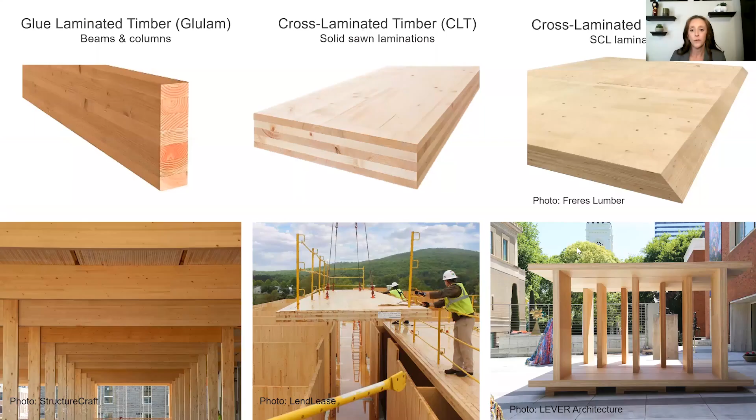So today I'm here to discuss with you the mass timber revolution. So mass timber is a very old concept that has become new again with the advent of technology and modern design practices and code changes. For those of you who are unfamiliar with what mass timber is, I'll just go over it very quickly. So glue laminated timber, many of you are probably familiar with. You may have this in your own home, or it has been in the roof of residences or commercial facilities that you've been in. So it is essentially dimensional lumber laminated together in the form of beams and columns.

Cross-laminated timber is the buzzword lately, and it is also 2x dimensional lumber laid out in sheets and laminated together with glue, and each layer is perpendicular to the next layer, and this allows for strength and structural stability. Another form of cross-laminated timber can come by utilizing wood veneers. So mass plywood panels is an example of this, where you take essentially what looks like very large plywood and secondary laminating them together, also adding to the strength and structural stability. So when we talk mass timber, think very large pieces of wood.

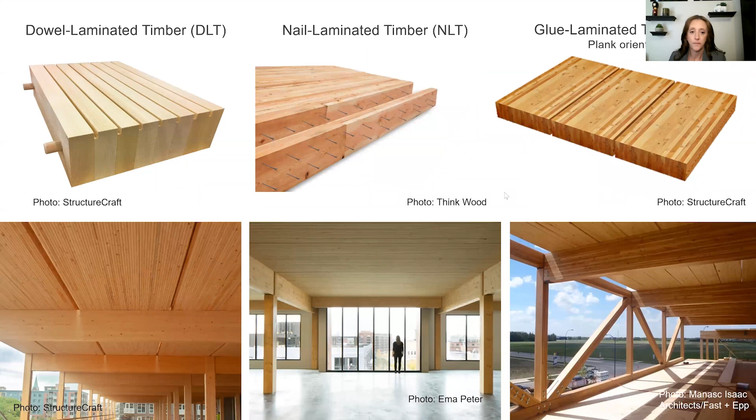Dowel laminated timber is dimensional lumber laid on its side and held together with hardwood dowels. This is often done in the factory and comes out as a finished product. Nail laminated timber is probably the very original mass timber and the very original dowel laminated timber. It is essentially dimensional lumber laid on its side and held together with mechanical fasteners such as nails. This can be done in the factory or on site. Glue laminated timber is a larger version of the glulam beam and column laid on its side and can be utilized for floor and roof decks.

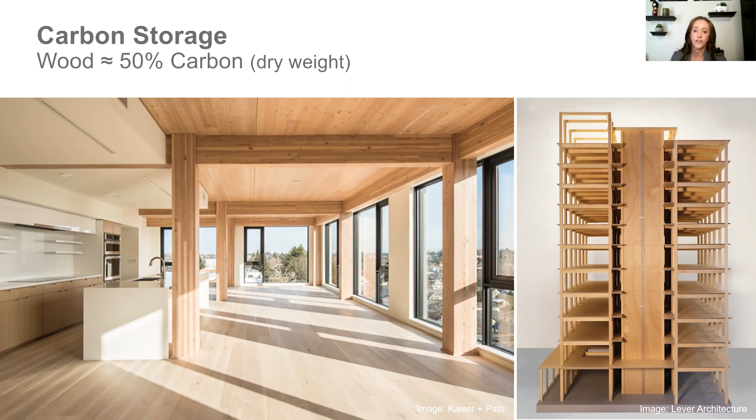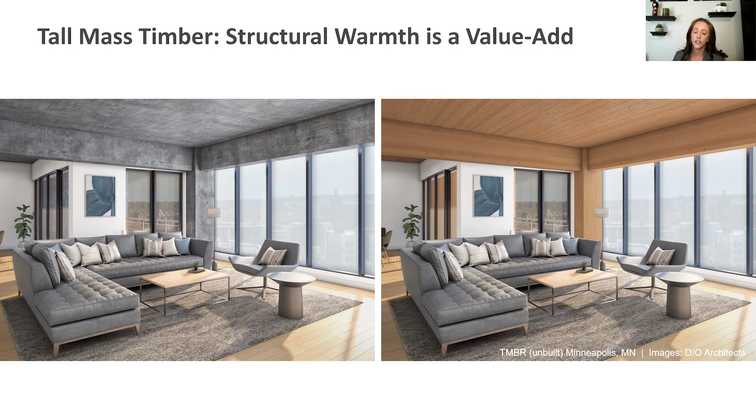As you can see here, exposing the timber as both the structure and the finish is a feature that many developers, occupants, and design teams are attracted to. It provides a warmth of structure that does not otherwise exist with other building materials.

Labor availability and labor shortages have plagued the construction industry for years. Mass timber projects regularly see significant reduction in the size of the crews needed to install these projects. That can help with some of the challenges projects face and make a project in timber definitely more feasible.

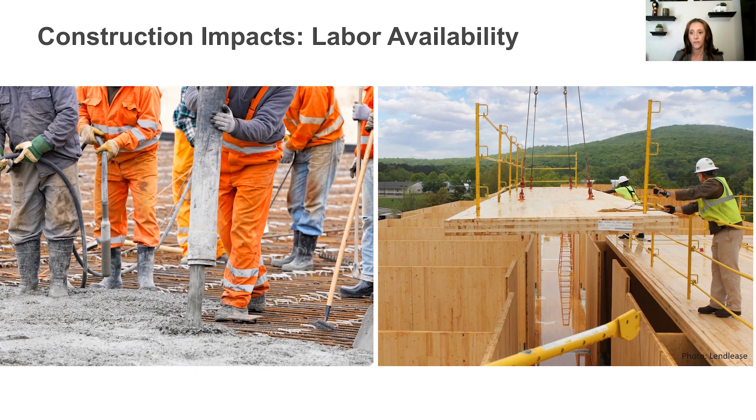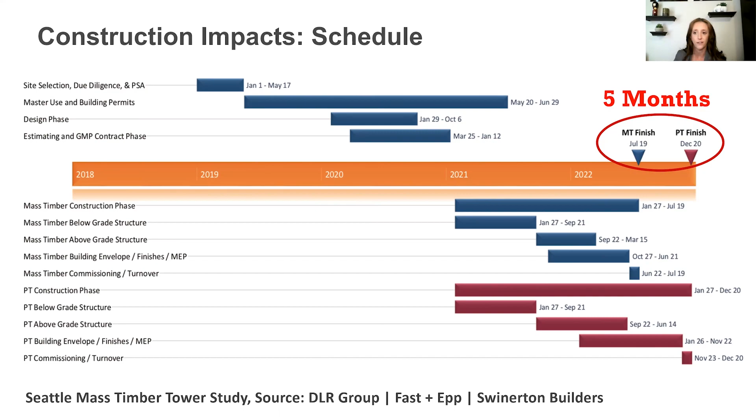So facilitating growth, how can we ramp up the adoption and acceptance of mass timber? So it starts with education and changes to the building code. So the International Code Council issues a new building code every 3 years. So the current building code is the 2018 building code. Many jurisdictions and states have not yet adopted that version.

For example, Idaho is largely using the 2015 International Building Code, but that is okay because mass timber was officially recognized in the 2015 International Building Code as a structural building material. However, come 2021, there are some exciting changes with regard to wood and mass timber specifically. So in the 2021 International Building Code, they're going to be incorporating some tall wood provisions.

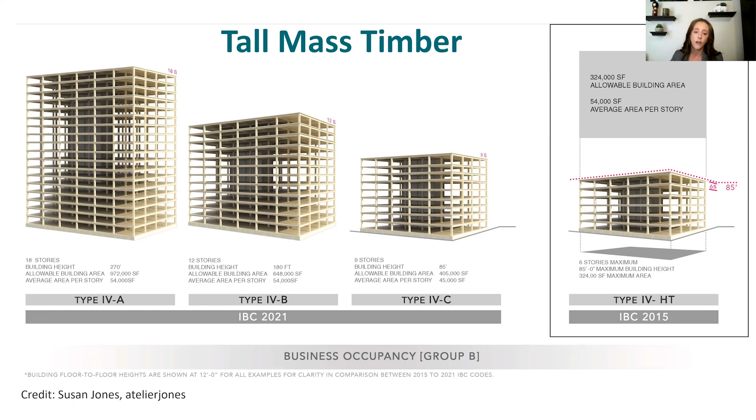And what this does: wood is currently only allowed to be utilized in a structure up to 6 stories in height. So in 2021, wood, specifically mass timber, will be allowed to go into buildings all the way up to 18 stories. So it is broken down into 4 different types. And with each step of the way, there are code provisions that will have to be adhered to. And a lot of that would have to do with how much of the wood can be left exposed.

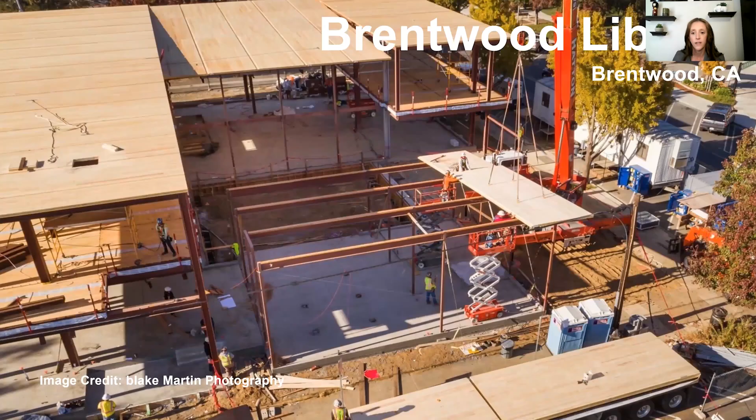Here's another library. This is located in Brentwood, California, and it is a 2-story library where they used CLT in the floor and the roof. And there's actually a second building on the campus, a 1-story auxiliary building where CLT was used in the roof as well. And one thing I'd like to point out is that this was the second project utilizing mass timber for this design team. And they only used CLT in the roof of their first project.

And what we're hearing a lot is that design and construction teams tend to dip their toe in the water with regard to utilizing mass timber. But once they've done it, they're eager to incorporate it again, and more of it, in subsequent projects. They find the material both fun and versatile and easy to work with.

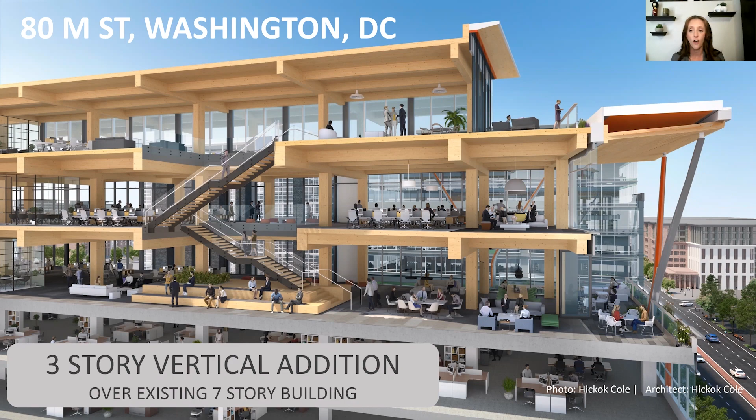This is also a very unique project. So one of the benefits of mass timber is it's relatively light in weight as compared to other building materials. So sometimes when you must expand, you must go up. So here is a building in Washington, D.C., of which they have added 3 stories of mass timber construction on top of an existing 7-story concrete building. So this is currently under construction.

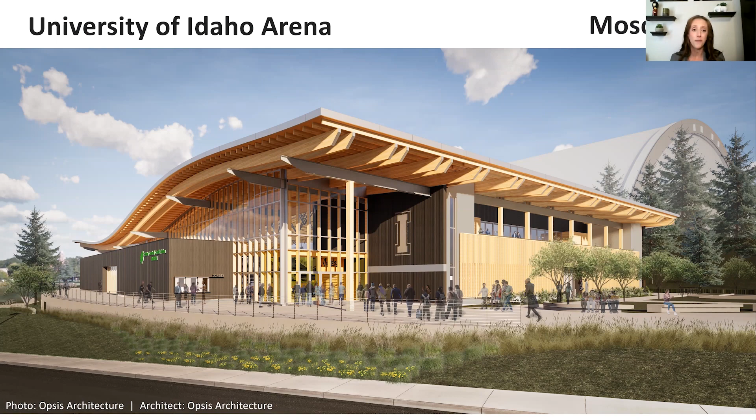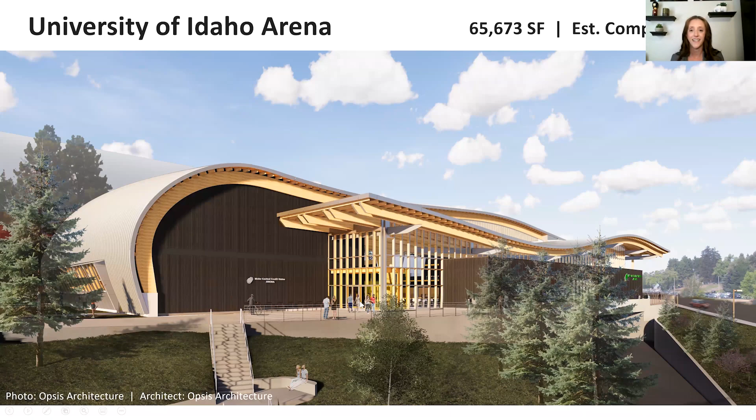This project, you might all be familiar with, is the University of Idaho Arena right here in Moscow, Idaho. And I won't go into too much detail on this project. Dennis Becker is joining us and he'll go in great detail. So this project is a 66,000 square foot arena that will finish construction in the summer of this year, and it is currently well under construction. So with that, I want to thank you for your time, and I'll turn it over to Dennis to talk more about the University of Idaho Arena.

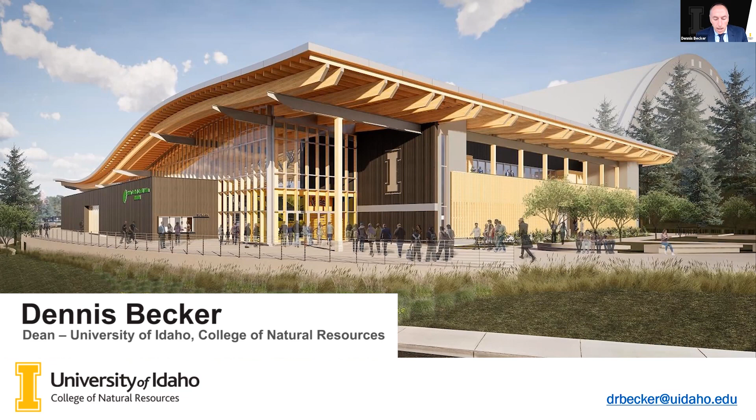My name is Dennis Becker. I'm Dean of the College of Natural Resources at the University of Idaho. As the land-grant institution of the state, our mission is to educate, conduct research, and provide outreach to the citizens of Idaho. We take that responsibility very seriously, and a bold demonstration of that mission is the Idaho Central Credit Union Arena being constructed on the Moscow campus. The ICCU Arena represents an application of mass timber in a uniquely Idaho way that builds partnerships and increases the ROI for Idaho through student training and public education.

People said we couldn't build this type of facility. They said it would be too expensive and that we lacked the expertise and workforce in Idaho to accomplish this. Well, in the spring of 2019, ICCU President Kent Oram and U.S. Forest Service Chief Vicki Christiansen joined me in breaking ground for a truly inspirational project that invested in Idaho companies, Idaho workers using sustainable Idaho wood. The U.S. Forest Service provided seed funding for initial design and building code review, and the Idaho Central Credit Union bought the naming rights. Today, we're just a few short months away from completing construction on the ICCU arena.

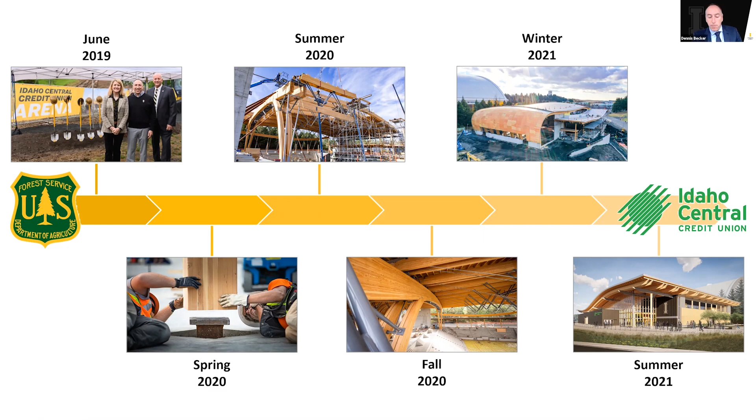Utilities and groundwork took about a year to complete, and this past spring, we set the first wood beam. From there, roof structure, walls, basketball courts, locker rooms were quickly constructed. And as we sit here today, the outside wrapping of dark cedar siding is being installed. Most of the building structure was completed in just one season, speaking to one of the benefits of mass timber. We are on schedule to complete construction this summer at a cost-competitive rate with traditional construction.

The ICCU arena was made possible through generous contributions of donors, student activity fees, and our strong relationship with the forest products industry in Idaho, which I would like to highlight. Douglas fir and larch were sustainably harvested from the University of Idaho experimental forests and surrounding public and private lands. The College of Natural Resources students planned and laid out timber sales on our forest. We worked with our student logging crew, and Mark Swanson Logging in Orofino, who transported the logs to Idaho Forest Group in Lewiston and Bennett Lumber in Princeton.

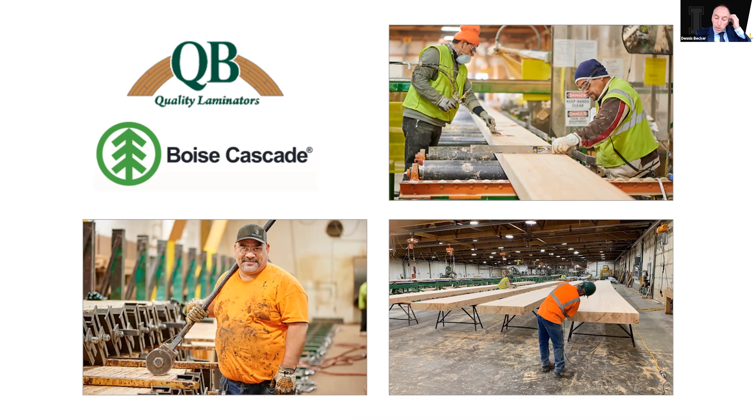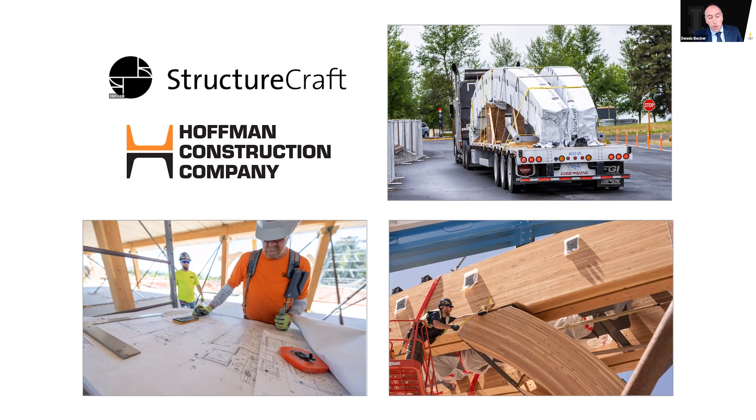From there, it was processed into lamstock, and it was shipped to Boise Cascade in Homedale and QB Laminators in Salmon. Employees in these two Idaho companies processed the lamstock into glulam beams, which were machined by StructureCraft in British Columbia and assembled on site by StructureCraft and Hoffman Construction employees, many of which are Idaho companies. The wood paneling for the roof was donated by PotlatchDeltic and St. Maries, and the cedar siding being installed today was donated by the Idaho Forest Group and Tri-Pro Cedar Products in Old Town, Idaho.

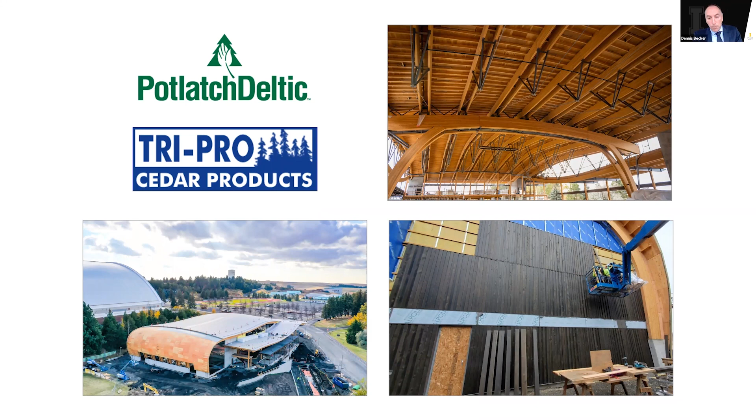KPFF consulting engineers in Boise were the principal engineers, and University of Idaho alum Chris Roberts with Opsis Architecture was the lead designer. So as you can see, the ICCU arena is truly an Idaho product made by Idahoans with sustainably harvested wood from Idaho forests by the University of Idaho.

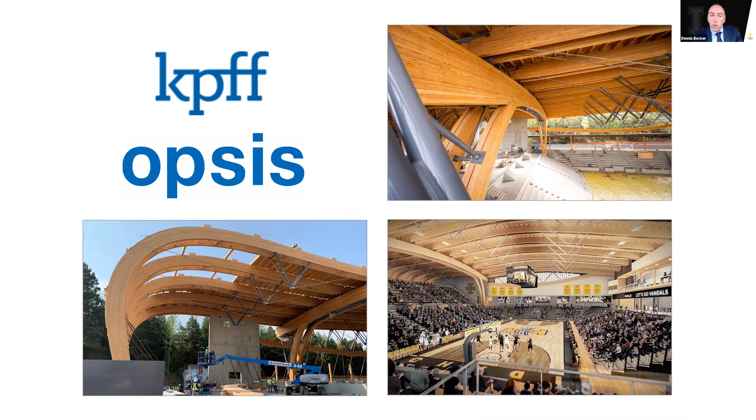Why is this important? Well, for every 1 million board feet of timber harvested in Idaho, 24 direct and indirect jobs are created. Those are jobs in your communities. The more we can do to promote mass timber construction, the more it helps Idaho's economy.

To put that in perspective, I need to give you a quick overview of mass timber markets. First, demand for mass timber in the U.S. will be dominated by California and large West Coast cities. Some construction will happen in Idaho, just like our ICCU arena, but our opportunity is on the manufacturing side. Quality wood is needed to manufacture CLT and glulam beams, which will largely be derived from Pacific Northwest and Canadian forests because of the quality of our forests.

Our main competition is Canadian softwood lumber from the interior of British Columbia. Tariffs do currently exist on softwood lumber entering the U.S., but not on finished products like CLT, which could push manufacturing expansion in British Columbia as opposed to Idaho. That said, existing production in the U.S. and Canada is insufficient to meet projected demand over the next decade. And so there is an opportunity for Idaho companies to capture market share because we have high quality lumber and because of our expansive forests managed in a sustainable manner.

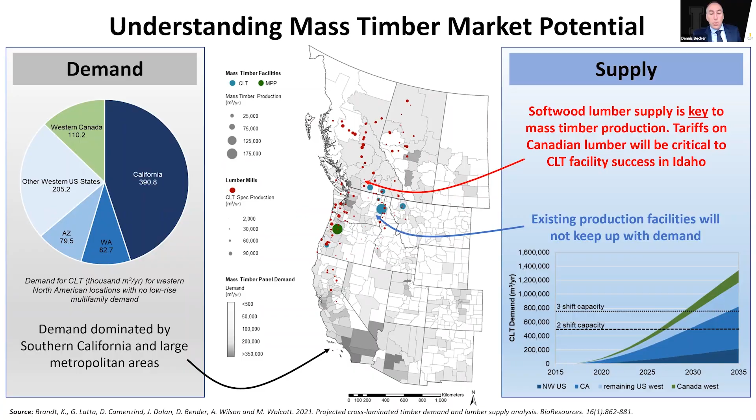Preference for using mass timber in commercial construction in Idaho is one important component for expanding mass timber markets, but so too is policy to ensure Idaho companies and forest landowners remain competitive. To that end, the College of Natural Resources is working with the Sustainable Forestry Initiative and our industry partners to tell our story and to promote the benefits of mass timber.

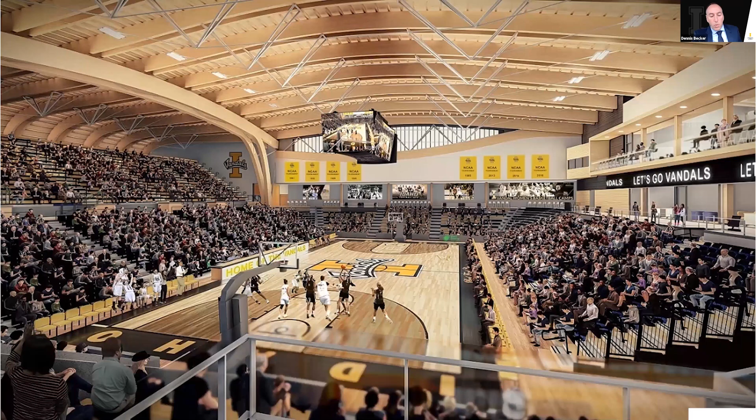So let's think about that story and how it could play out in your communities in the different parts of the state. Imagine yourself walking through the doors of the ICCU arena to the sound of the University of Idaho marching band. Those of you who are Vandals are already singing the fight song in your head, I'm sure. You're running your hands along the charcoal-stained cedar siding at the main entrance, you can smell the wood. You're watching a Vandals basketball game, or maybe you're listening to the cool sounds of a saxophone during the famous Lionel Hampton Jazz Festival. Now imagine yourself taking a picture of your daughter or your grandson at graduation under the 20-foot I logo on the front of the building. She's smiling back at you and thinking how proud she is to have graduated from the University of Idaho.

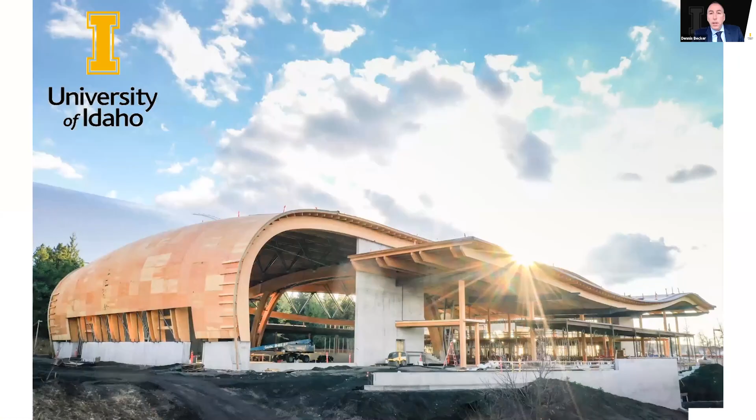This is a place for sports and events, but it's also a place for learning. It's a place to learn about engineering and architectural design, to learn about the chemical properties and adhesives used in wood bonding. It's a place to learn about sustainable forest management, and it's a place to train the leaders of tomorrow. So I hope you will join me this fall when we open the arena to watch a basketball game, experience the excitement of graduation day, or listen to the cool sounds of jazz. Thank you.

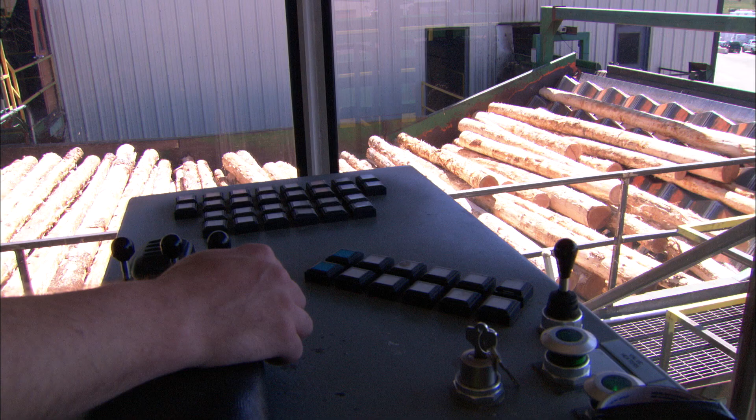I'm John Reiling, Chair for the Intermountain Section of the Society of American Foresters. As a mid-career forester in Idaho, I see a lot of challenges in our future for managing Idaho's forests and growing population. But I also see a lot of opportunities. The industry is strong with over a century of proven trust, providing sustainable products and economic contributions, including stable jobs and livable wages for Idahoans.

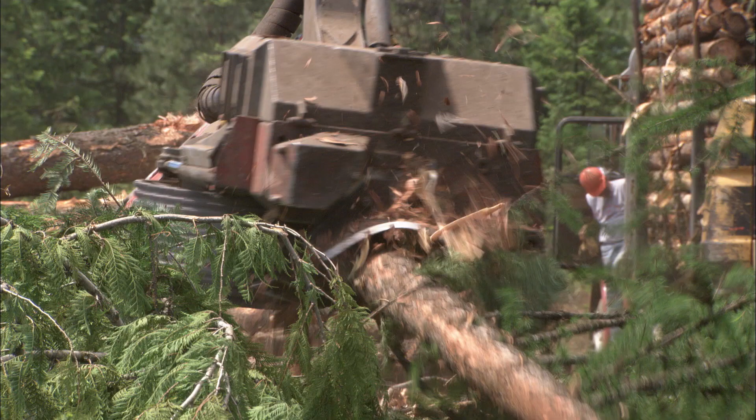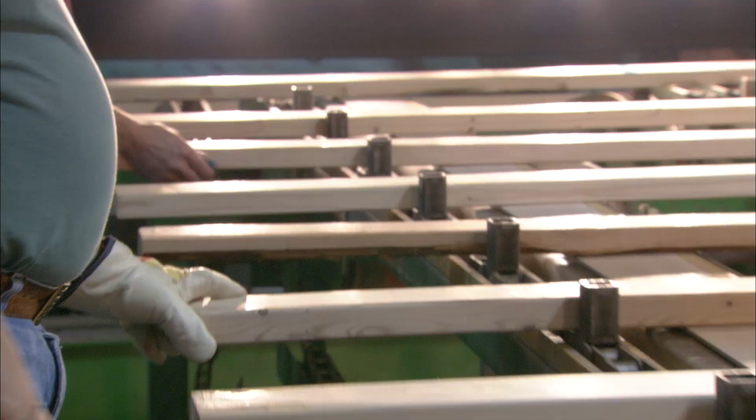Projects like the U of I Arena demonstrate a beautiful collaboration and the multifaceted benefit of Idahoans working together, utilizing Idaho's natural resources. There's growing opportunity for wood products to provide positive solutions to a growing population and subsequent structure needs, while benefiting ecosystem services and the climate. Passing legislation that helps to expand mass timber markets in Idaho and capturing market share is a key part of the solution. Embracing the use of sustainably harvested timber is healthy for Idaho, Idahoans, and our planet.